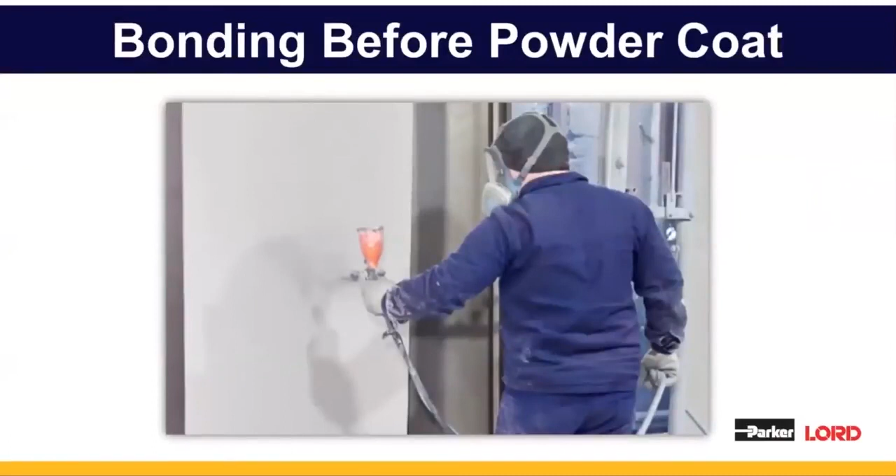So let's get started with the harder of the two applications, which is bonding before the powder coat process. These are the general instructions to follow to ensure that you have a good bond before your parts go through the oven. The most important step, and the one that we'll spend most of our time on, is step 3, which is fixturing and building handling strength.

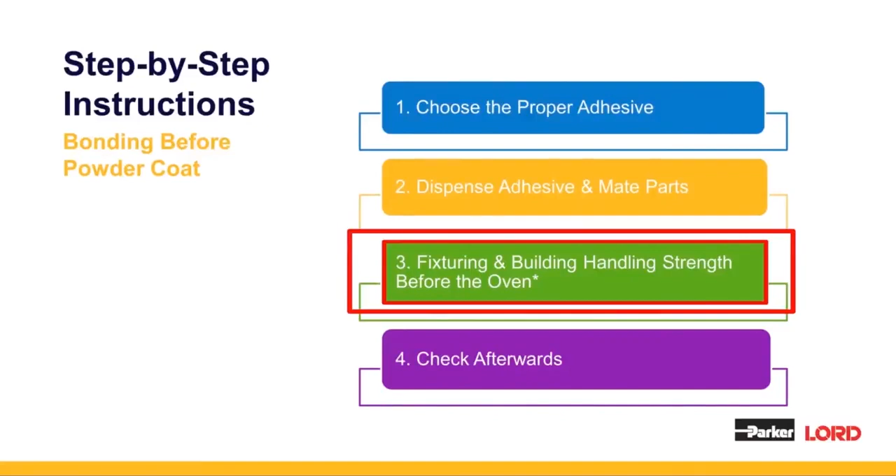Before you select your adhesive, there are a few things that you'll want to consider. The materials you're bonding, the final weight of the bonded assembly, and the details of your bake process will all determine which adhesive you should be looking at. Other things to consider are your desired tact time as well as your UL requirements. Be sure when you talk with us and you're bringing your applications to us that you keep this list handy and that you're referring back to each of these points and you have your answers ready so that we can help you select the proper adhesive.

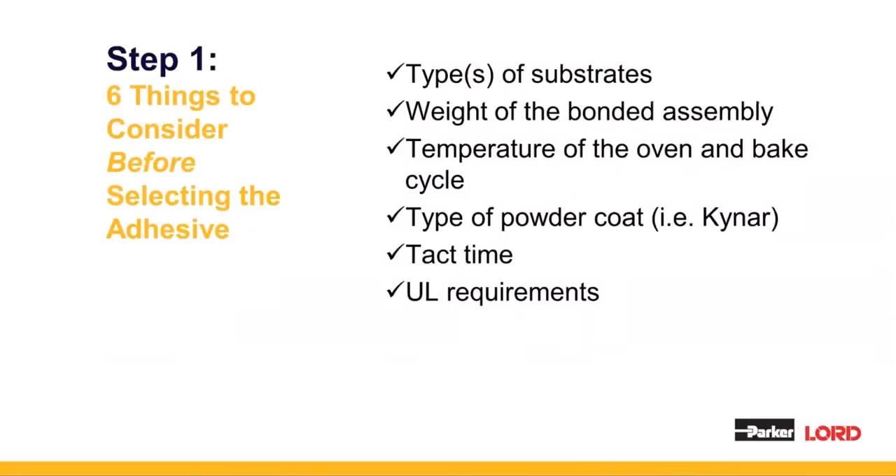Now, these are the adhesives that you would ideally choose from when you bond before powder coat. We have essentially four different options of adhesives that can go through a powder coat bake process. They all have temperature resistance of up to 400 degrees Fahrenheit or 204 degrees C for up to 90 minutes. So you don't have to worry about the bond line degrading as it goes through the oven.

Another great advantage of Lord acrylics is they will come out of the oven stronger than they would just curing at room temperature. And this is a unique property of our technology. And you can see in the slides that we have a tensile strength rating as well as a tensile strength with post-bake. And so that is the difference in the tensile strength both before and after it goes through the powder coat. That is a unique property for Lord technology.

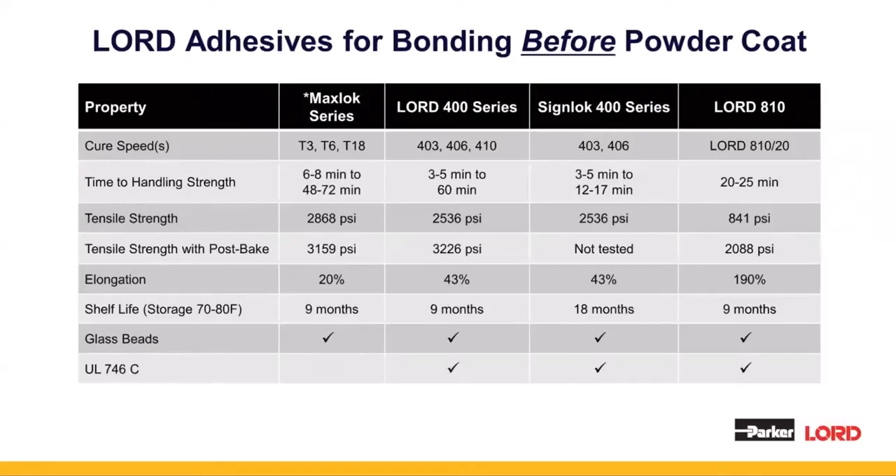The last product we'll talk about here is the Lord 810. This is a highly flexible metal bonding adhesive designed to eliminate read-through, or the appearance of the adhesive showing up on the back side of, say, a thin gauge panel. We recommend this product for thin gauge substrates and/or for Kynar bake process cycles.

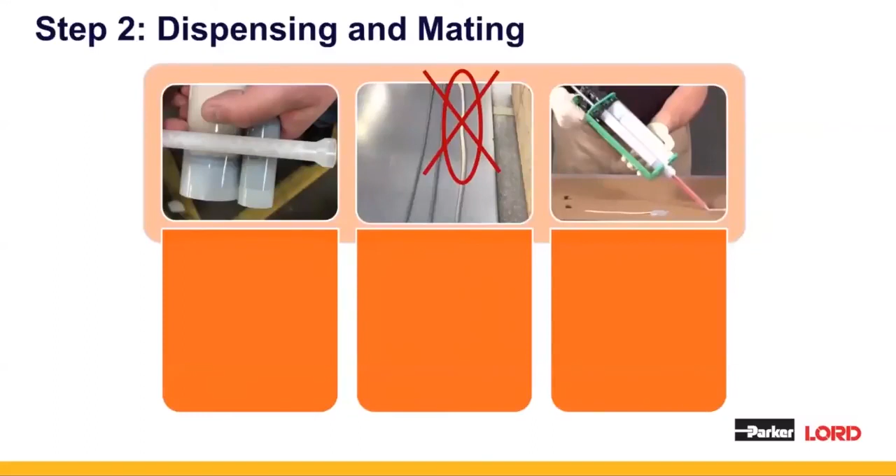Step 2 will determine if you're setting yourself up for success or for failure. More often than not, the plungers of your cartridge are not level. As you can see in the picture to the left, this is just a visual to show that the plungers on either side of the cartridge are actually not level. And that's because we fill each side separately at our plant, so they're not always exactly even.

The first step in setting up your adhesive is leveling your plungers, which you do by dispensing some of the material without the mix tip on until you see both sides coming out evenly. This will really ensure that the product is on ratio, because if it's not, the adhesive won't cure properly and it could result in poor adhesion.

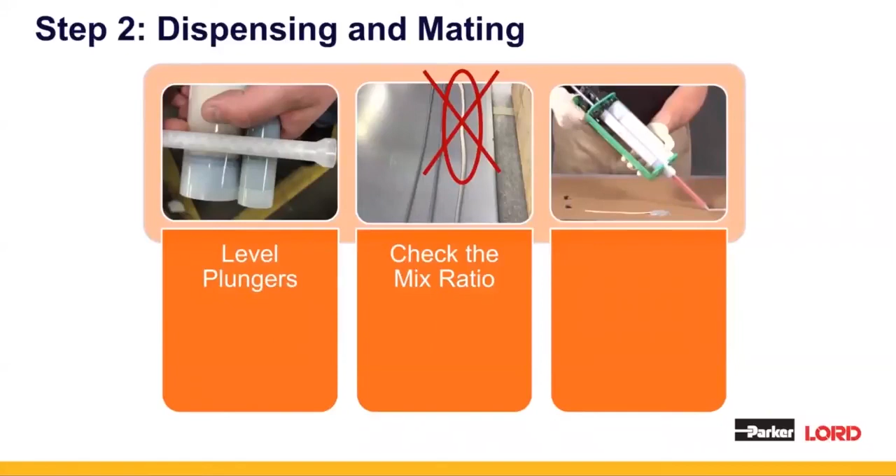And you can see this before the parts even go through the oven. Now, if you'd like more help with leveling your plungers or loading a cartridge into a dispensing gun, you can check out our YouTube channel for a video on exactly how to do this.

Now, you should always make sure to check the ratio of the adhesive before you get started, which is something you can do in two different ways. You can look for color irregularities, as you see in the middle picture here, and that is actually a big no-no. So if you see color irregularities there, it usually is a big indicator that there's something wrong with the adhesive, or your mix ratio is off.

Another thing that you can do is dispense some of the adhesive on the side and use a tongue depressor to ensure that it's hardening up. So once those two things are completed, you can dispense your adhesive and mate your parts. Just be careful to note the open time of the product that you selected and the temperature of the environment in which you're assembling.

So for Lord adhesives, all of our times in our tech data sheets are rated to room temperature or ambient temperature, which is going to be anywhere between 72 and about 74 degrees Fahrenheit. And our rule of thumb is that for every 20 degrees above the ambient temperature, you're going to cut your open time in half, meaning you're going to have less time to work with the material.

Now, if you don't mate your parts in that open time, the adhesive is going to skin over and it's going to result in poor adhesion, if not no adhesion. So that's really important to make sure that you're staying within your open times to ensure that your parts aren't going to come apart, not necessarily just in the oven, but once you have your parts installed in the field.

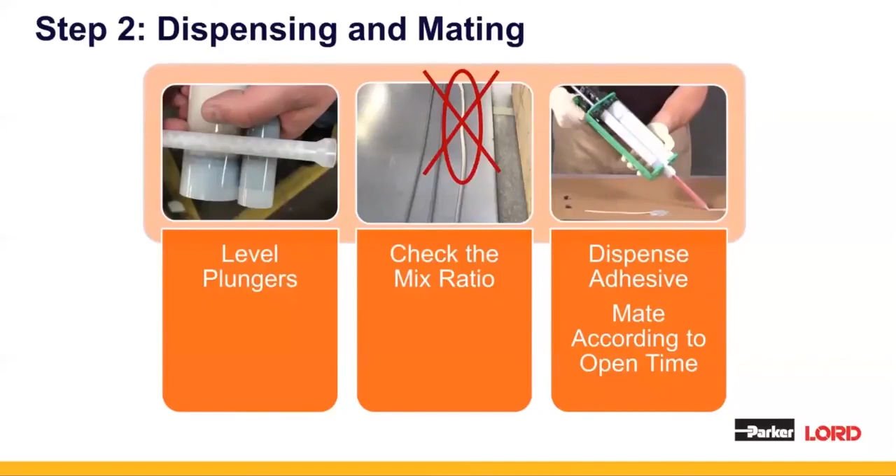Once your parts are mated, it's important that they don't come apart. If the bond line separates and becomes remated, you can actually entrap air. And air entrapment will certainly cause failures, sometimes as quickly as coming straight out of the oven. In this slide, there's a picture of what air entrapment looks like. You can see splatter marks on top of the squeezed out bead of adhesive.

And this is something you don't want to see. This means that there has been air that's been trapped in and the panel has sprung up and squeezed back down. What you want to see is actually just a smooth, even layer of adhesive. So if you do see this air entrapment, what you're going to have to do is completely start from scratch. So that means taking apart your parts, cleaning off the adhesive, and beginning the bonding and assembly process all over again.

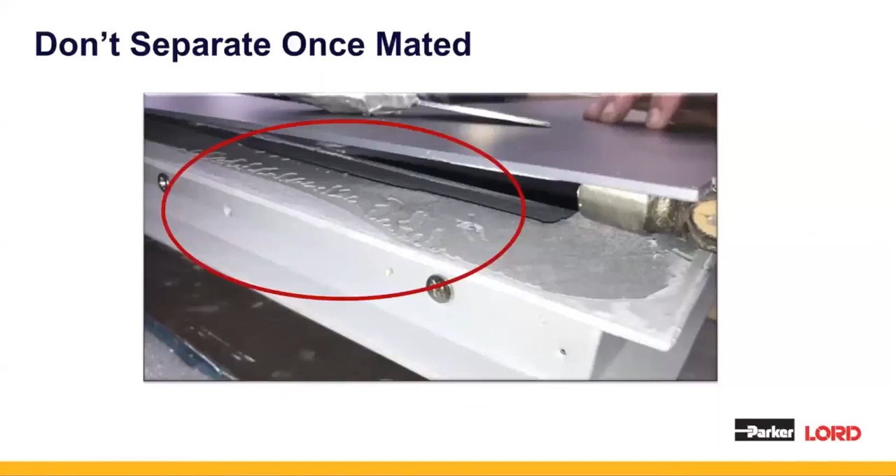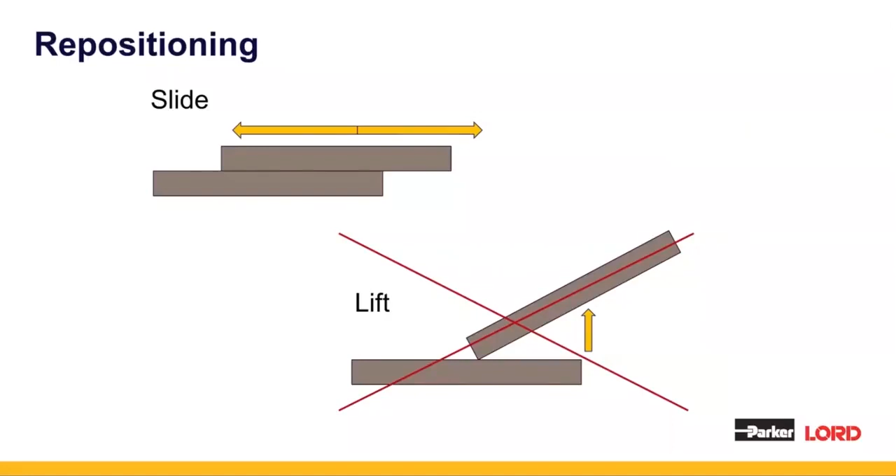Now, if you need to reposition your parts, it's best to do this by sliding, not by lifting. Lord acrylic adhesives are equipped with glass beads, which help to enable sliding for repositioning. But if the parts do come apart, or if you simply need to rework the assembly, just scrape off the adhesive, clean with an alcohol wipe, and then start the process again.

Once you have your parts laid out the way that you want them, it's time for clamping, or fixturing, as we call step 3. Your parts should be weighted with even pressure until handling strength is reached. You also want to follow one of the 2 recommended paths for proper clamping. You can do this either by starting on one end and working your way down, or you can start in the middle and work your way out, making sure that you maintain about a 4-inch spacing in between each clamp.

The path you choose will depend on the size and the shape of your parts, but this is really your preference. What you don't want to do is start on either end and then work your way towards the middle. This could cause the part to bow slightly in areas between the clamps, resulting in poor adhesion in some areas and even stress concentration in other areas. Air also becomes entrapped when your parts bow.

So it's important to know that handling strength will vary depending on the size and the weight of your parts. The heavier and bigger the part is, the more handling strength you'll need. A great place to start is our handling time rating and our tech data sheets, which you can download off our website, lord.com. Now, clamps are just one option for fixturing. There are multiple things that you can do to make sure that your parts don't come apart in the oven. You could use more permanent methods like rivets or spot welding.

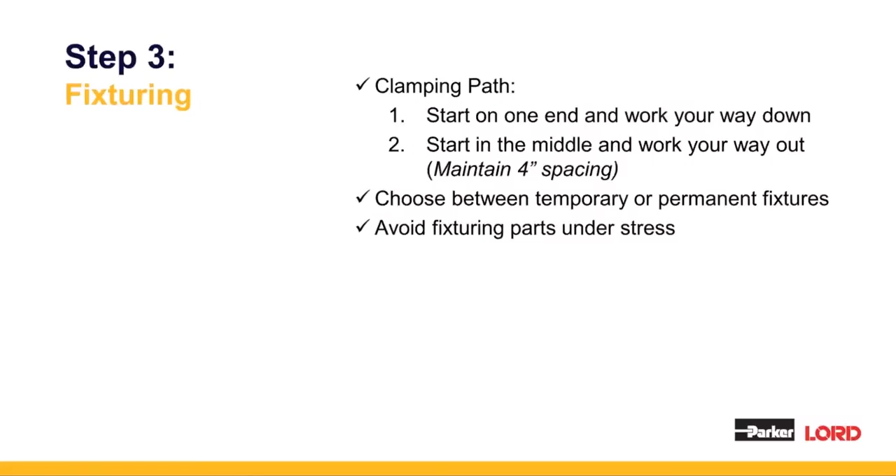Now, when you're ready to go through the oven, you want to make sure that you are avoiding bonding parts that are under stress. For example, if parts are formed and they're pressing away from the substrate that you want to mate to, you're going to be bonding stress into that, and it's going to want to already come apart. And then as the bonded assembly goes through the oven, the adhesive is going to soften slightly when it's introduced to that heat.

And that softening is going to lower the strength of the adhesive, and the part is likely going to come apart. So if you do have some formed parts, try and get them as flat and as smooth as possible before you're bonding them so that they don't come apart in the oven.

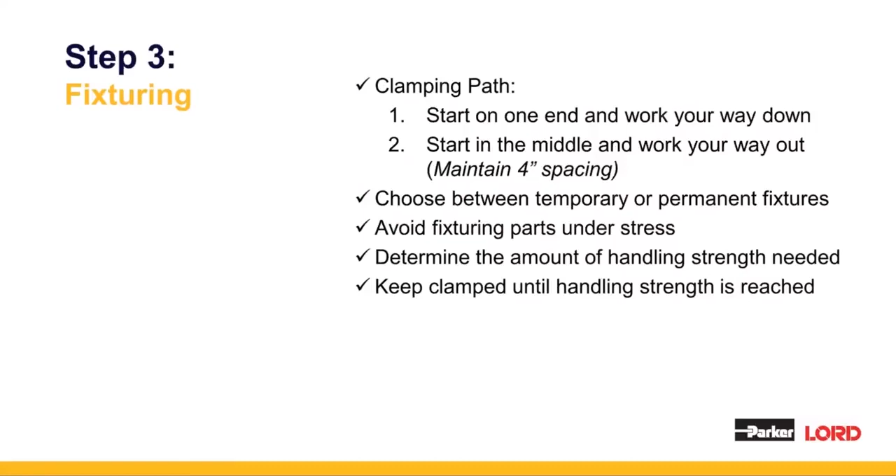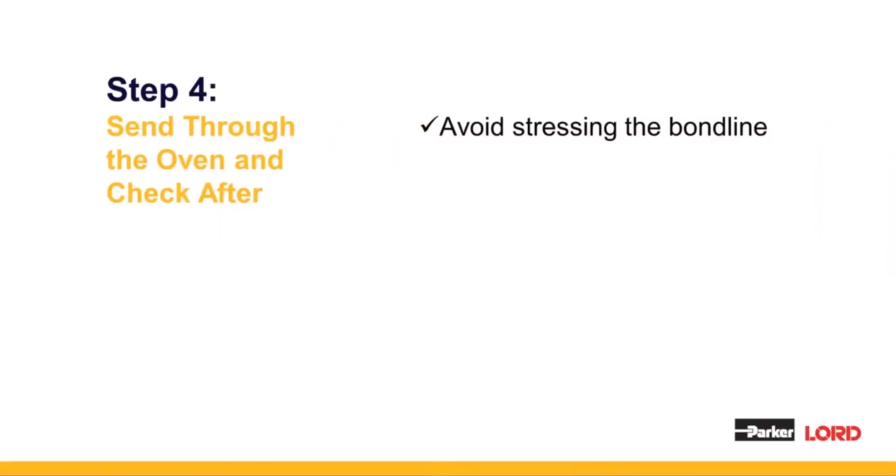Now that your parts are properly fixtured, it's time to go through the oven. Avoid hanging parts such that you're putting the bond line in shear stress or peel stress, and try to use rolling racks or jigs for particularly large and heavy parts.

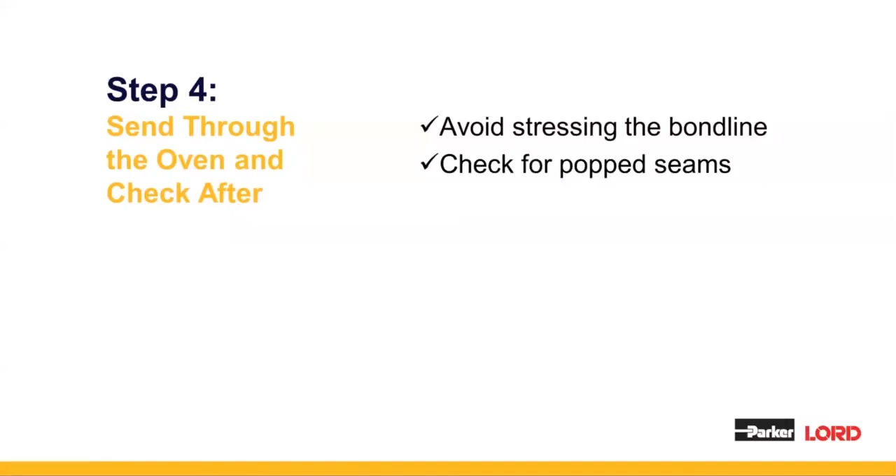After the parts come out of the oven, make sure to check your joints for any popped areas or seams. And if you suspect that there was air entrapment, grab a wedge and jam it into the bond line. Put the bond line into peel and just break it apart. That way you can see what the bond line is in between.

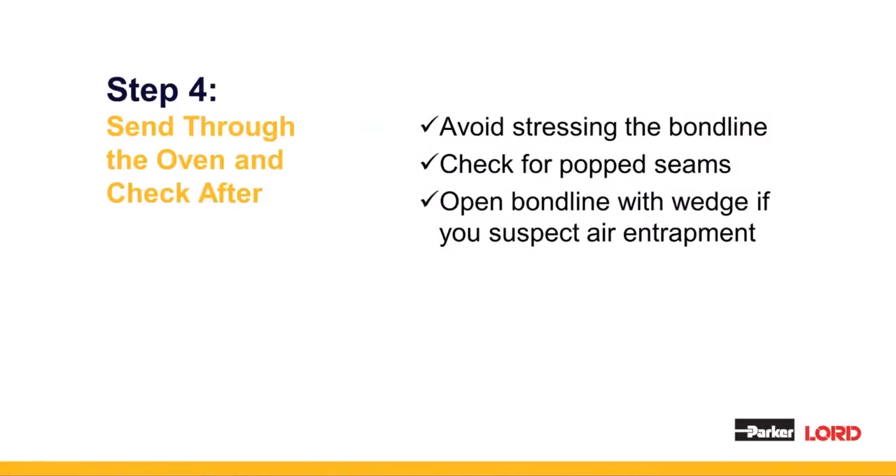Now, we recommend this technique to be used really only on test parts, as these will likely need to be scrapped afterwards. If air does become entrapped, it's best to catch it before the parts go through the oven so you can restart your bonding process and not worry about scrapping your parts.

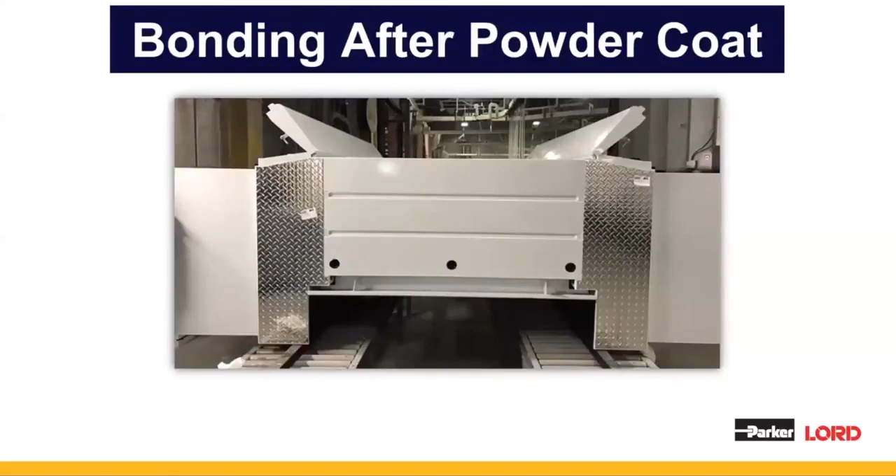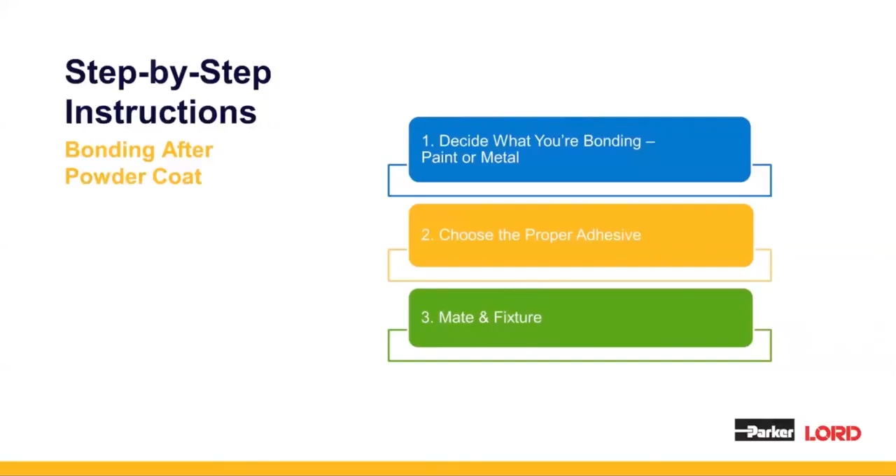Well, we've gone through the bonding process before powder coat. Now let's go through bonding after your parts have already been painted. This process applies not just to powder coat paint, but to any substrate that's been primed or painted. Here are the general guidelines to follow for bonding after you go through a powder coat process or bonding right to paint. As you can see, it is fairly similar, especially when you get to mating and fixturing, to the bonding before powder coat process.

So the primary difference comparing bonding after versus bonding before is when you bond after, you really have to make the decision first on whether you want to bond to the metal or to the paint. Bonding to bare metal is really our preferred option because your bond strength is more predictable and oftentimes more reliable than bonding to the paint.

When you bond to paint, the strength of the assembly is only as strong as your paint, but I don't want to let that scare you. We have been bonding to paint for many years and have thousands of applications that have bonded to paint successfully. So it is doable, you still can do it.

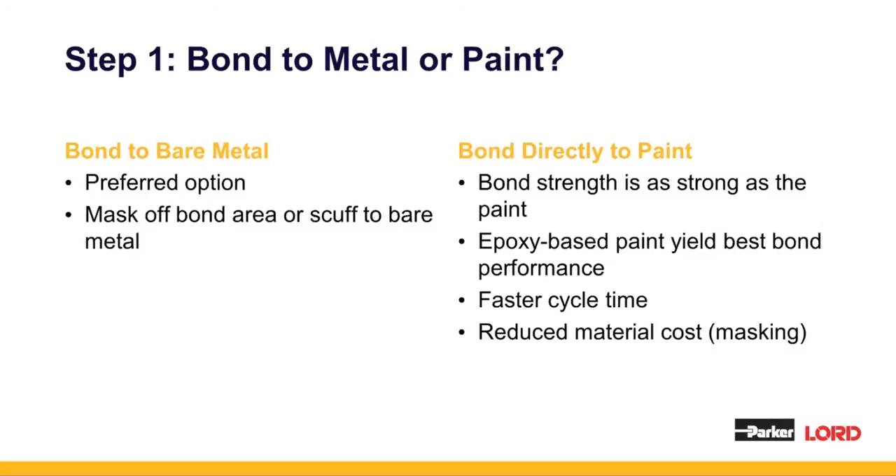The benefit of bonding right to the paint is you get a faster cycle time and reduced material costs, mostly related to the prepping. You don't have to worry about the extra cost of the masking tape, and you save yourself some time in the prep by just bonding right to the paint.

Once your parts are prepped, mate and fixture your parts using the same guide as for bonding prior to powder coat, ensuring you understand the handling strength you need and are clamping your parts long enough to reach the required handling strength. So for bonding to powder coat, these are your 4 options.

You have Maxlok and 400 series, which from earlier slides you saw that you can use for bonding before powder coat. And these are great options for bonding right to paint. The other great benefit of these 2 products is you can cross-bond painted substrates to bare metal as well, which is the example in the picture we opened with. So these are 2 great options that you can keep in-house for bonding both before and after powder coat.

The next 2 recommended products that we have are 7542 and 7545. These are urethane-based adhesives and they grip very, very well into paint. More often than not, these are our first recommendations for bonding to powder coat paint or primed or painted metals.

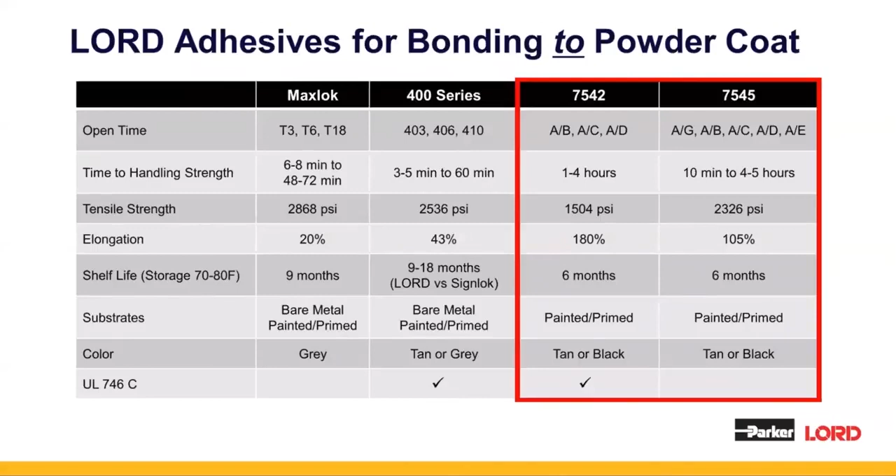And the big difference between the 2 is the 7542 has UL 746C approval, and it has a lower viscosity, which makes it great for going into tighter tolerances. The 7545 is more of a paste consistency. It has a lot higher viscosity.

Once your parts are prepped, mate and fixture your parts using the same guide as for bonding prior to powder coat, ensuring that you understand the handling strength you need and are clamping your parts long enough to reach the required handling strength. If you do decide to scuff, make sure you scuff all the way down to the bare metal and follow with an alcohol wipe. And then after that, just mate and fixture as usual.